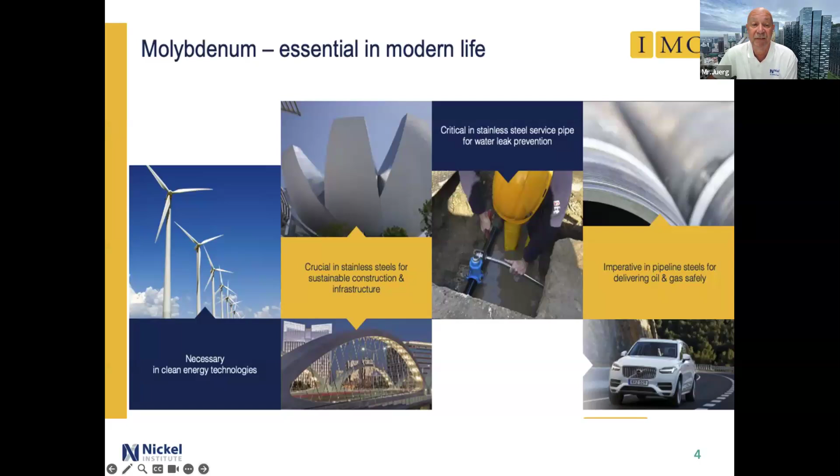The International Molybdenum Association, in short IMOA, is a global non-profit trade organization like the Nickel Institute, representing most of the molybdenum industry. It promotes the properties and sustainable benefits of molybdenum, a key alloying element in stainless steel and nickel-based alloys, enhancing corrosion resistance in various modern applications.

And now it gives me great pleasure to introduce to you Dr. Graham Sussex. Graham is an expert in corrosion and materials consulting with over 35 years of experience. Serving as a consultant for the Nickel Institute for more than a decade, he brings extensive knowledge in stainless steel applications and standards. He has also been a technical specialist with the Australian Stainless Steel Development Association for over 20 years. His active involvement in ASTM and Australian standard development has significantly contributed to the advancement in the Australian-New Zealand welding standards for stainless steel. And with that, I would like to hand over to you, Graham, and to everybody. Enjoy the topic, and I hope we will get a lot of questions. Thank you.

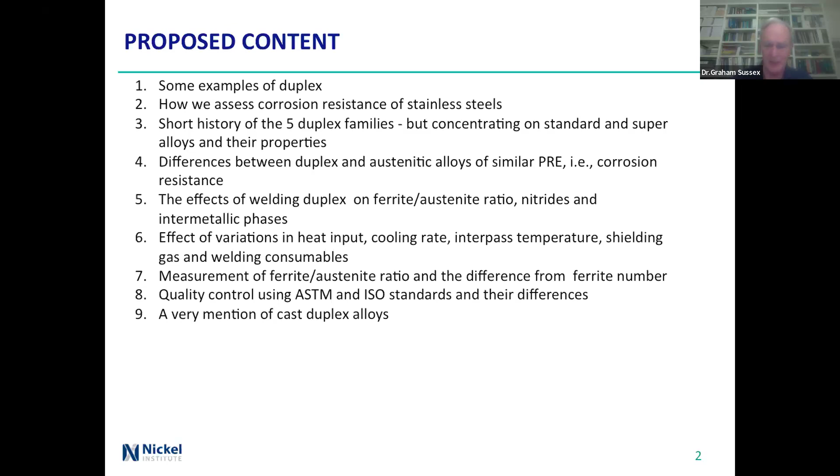Talking about the pictures I showed first, on the left was a super duplex welded tank for impure phosphoric acid - lots of strength, lots of corrosion resistance. In the center, a tank on a ship made out of 2205, a very reasonable match of thermal expansion with the carbon steel hull, a lot better than austenitics. It's pretty strong, reasonably light because it was thin, and it's got corrugations in it to give more strength. Okay for near ambient temperature with chlorides up to certain limits.

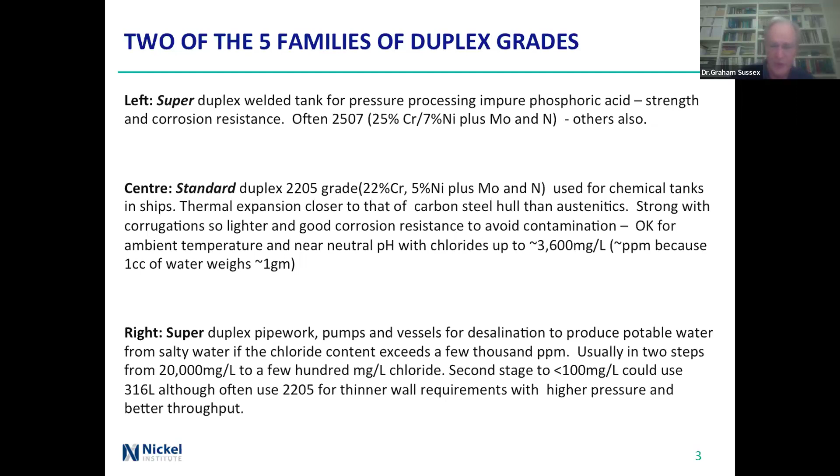Across to the right, from a desalination plant - pumps, vessels, pipe work getting potable water. It goes in 2 steps usually: 20,000 milligrams per litre down to a few hundred, then second stage down to under 100. While you could use 316L for those, often people use 2205 because of thinner walls and so on.

There are 3 more families. The hyper-duplex grade - I don't have a picture because there's basically only one supplier at the moment, seamless pipe and strip, and welding them can be quite difficult. The 2 lower grades, the low alloy ones, have a bit more chrome and moly, better corrosion resistance than the leans, not a lot of difference - you'll see that in a minute. Slightly lower strength, but easier to weld. It was used in the Hong Kong to mainland bridge reinforcement, but more commonly in heat exchanger tubes.

The lean alloys have lower nickel, often more nitrogen, because otherwise it doesn't stay properly duplex. For getting the nitrogen in, they often have higher levels of manganese than you'd normally expect. Lower cost, good strength, great for tanks.

What are the advantages? You get benefits from ferritic and austenitic properties because it's mixed. The mechanical properties are about twice the proof strength of austenitics. It strengthens up with cold work, but not as much as austenitics, so you can get more strength but you won't get the doubling you might get with an austenitic. Ductility and formability is quite good, but again a bit less than the austenitics. And you can select the corrosion resistance.

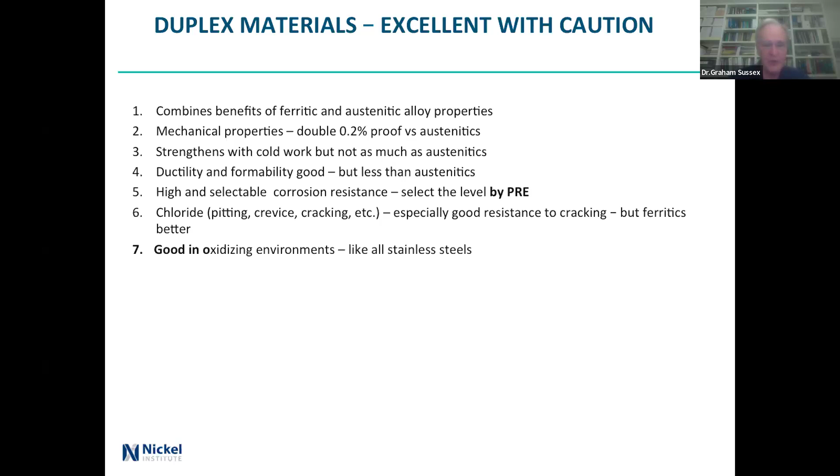Ferritics are going to be better. Very good in oxidizing environments like all stainless steels. High temperatures, well, not really - structural up to about 315°C, although some people hold it to about 280. But you don't put it in the high hundreds for a long time, and I don't mean hours, I mean minutes, because you get bad phases forming. That can be a problem with welds, and we'll talk about that in a few minutes. Low temperatures, minus 50 or so, nothing like the austenitics which go down to absolute zero, minus 273.16 - and the 0.16 is apparently very important.

It embrittles with hydrogen, and it's less available than the austenitics. Austenitics are roughly about 70% of the world market, ferritics 20% or a bit more, and the duplexes have to fit in there. Quite good weldability, but it's a bit sensitive to time at temperature because of getting extra phases, and we'll talk about that.

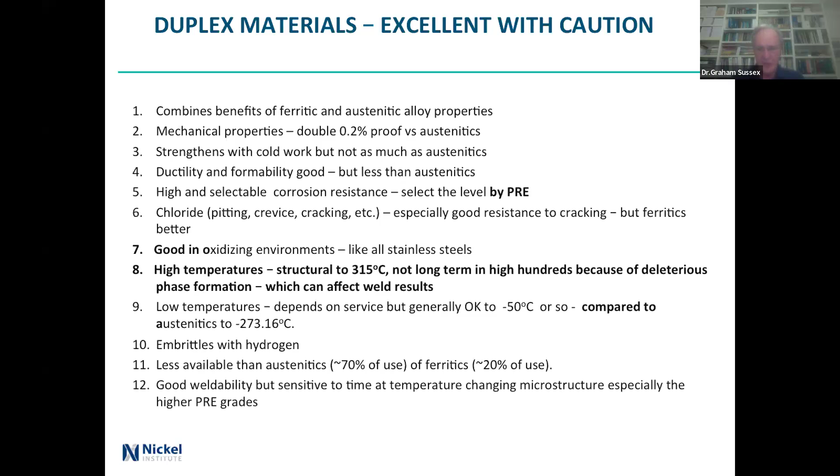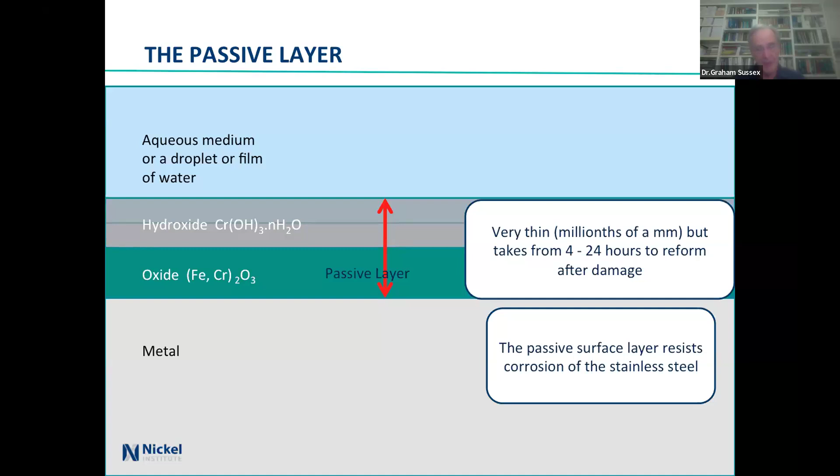So, stainless steels - a passive layer forms when you get moisture in the air, oxygen, a nice thin passive layer, millionths of a millimetre thick, but it takes somewhere between 4 and 24 hours to reform. It doesn't happen instantly, so if you carefully brush the surface up and then put it into service immediately, you don't expect to get absolutely top-rate quality out of it.

What's in it? Chrome, moly, nitrogen give you corrosion resistance, and the nitrogen, nickel, and manganese give you your physical and mechanical properties. The amount of material in there - manganese I've put up to 11, that's only in some of the specials where you've really got to work at getting nitrogen in, because manganese does make it a bit easier.

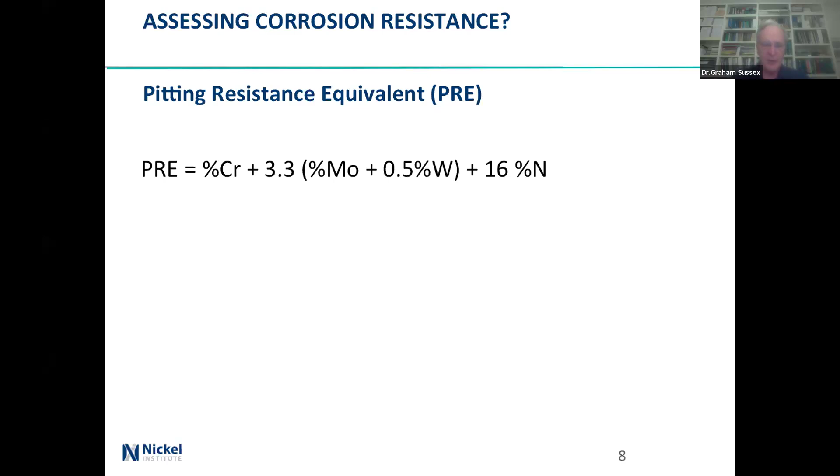Pitting resistance equivalent, the formula you've probably all seen everywhere. The W is only for the tungsten versions that come out of the Zeron 100, that sort of stuff. But the rest has been around for a long while. If you're looking at ferritics, and we're not usually, then you drop out the nitrogen term because basically you don't get nitrogen dissolving.

And if it's more than about 40, then it'll stand up to seawater. There's nickel not in there. I've lost count of the number of times people say the nickel isn't good enough, therefore we're going to have bad corrosion resistance. It's not true. It simply selects what happens in terms of what the microstructure is.

And this is a formula that was worked out for austenitics. It does work for ferritics, it does work for duplex, but it's only an approximation. So if you get a variation of 1 or 2, it may well not be critical, but it does work, as I say, for ferritics.

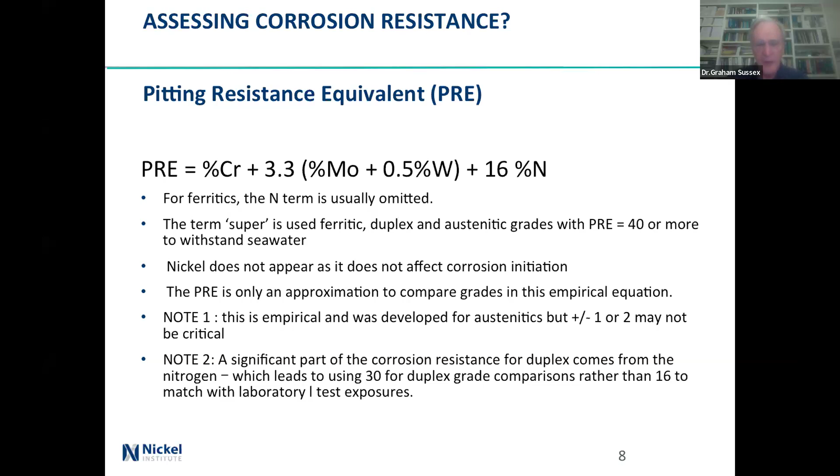A significant part of the corrosion resistance for duplex comes from the nitrogen, particularly for the lower alloy ones. So quite often you will see a 30 instead of a 16, because it was found that if you just used that PRE and compared it with a chemical test, you got a lot worse results from this PRE number, as in it said no, it won't work, but it did work quite well. That's basically because if the nitrogen is up, then you put up a higher ratio.

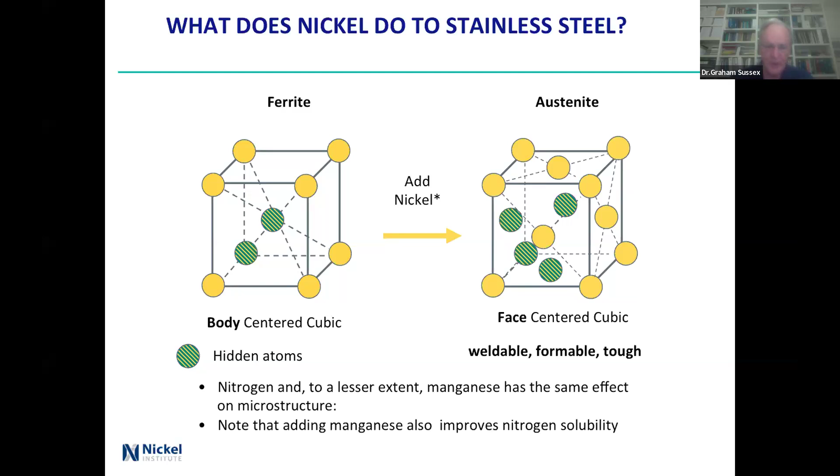Body-centered cubic ferrite, add nickel, and you wind up with face-centered cubic, weldable, formable, tough, and nitrogen is one of the things that help with that, making the structure. And if you add manganese, as I've already said, it improves the nitrogen solubility. So that's ferritic on the left.

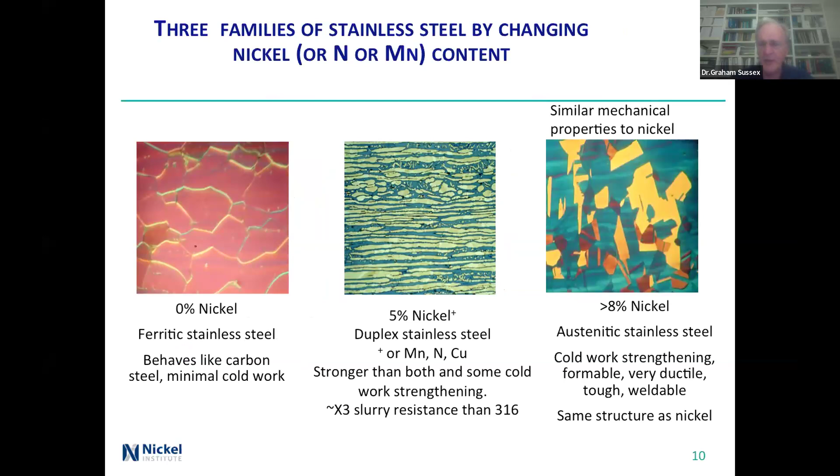Add some nickel, but not a lot, and you get the duplexes, and I'll talk about that picture in a bit of time. And of course, if you go the whole way, then you get the austenitics across the far side.

So just a bit of history. Sweden back in 1929, 357 tons of an alloy made in 1932, so a long time ago. And the early grades were neither low carbon nor alloyed with nitrogen. You had to wait until the 1970s when we got argon oxygen decarburization and control of gases to get reliable welding and to get good compositions.

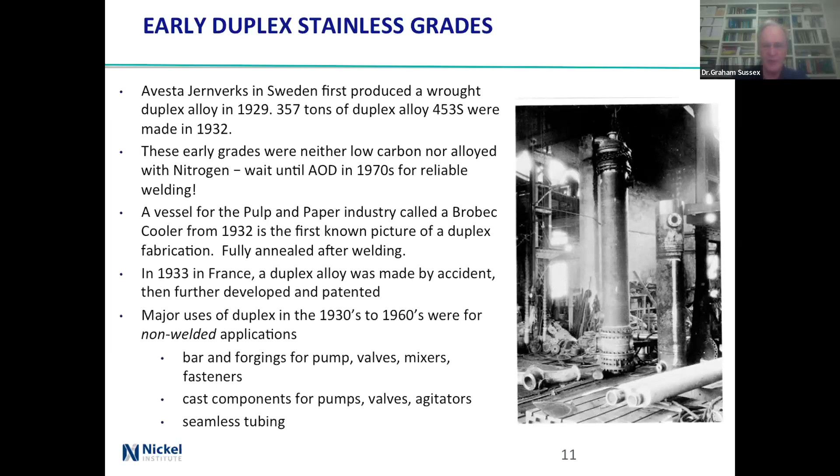So I did the wrong thing. This was a vessel called a Brobec cooler, 1932, fully annealed after welding. Interesting job, fully annealing that. In France, there was a duplex alloy made by accident in 1933, and through from about the 30s to the 60s, it was for non-welded applications: bars and forgings, cast components, seamless tubing, basically because you couldn't weld the stuff. There was no good control of the nitrogen in particular, and it was also a bit difficult controlling the carbon.

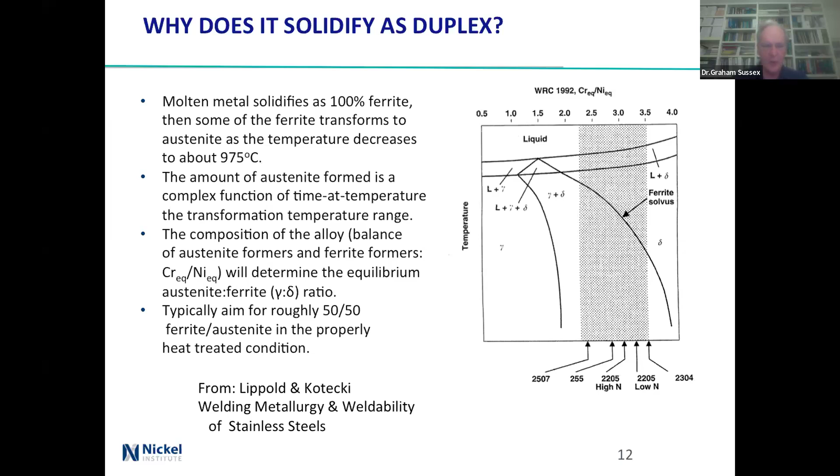If you get too high ferrite, you get poor low temperature toughness, pretty awful stress corrosion cracking from sulfides, poor corrosion resistance because of chromium nitrides forming, and probably lower tensiles. You get too high austenite, hey, chloride stress corrosion cracking here we come, and you'll get lower yield and tensile strength. Typically you aim for ferrites of 40 to 60 in the base metal and 30 to 70 in the weld heat affected zone, but the closer you can get to 50-50, the better.

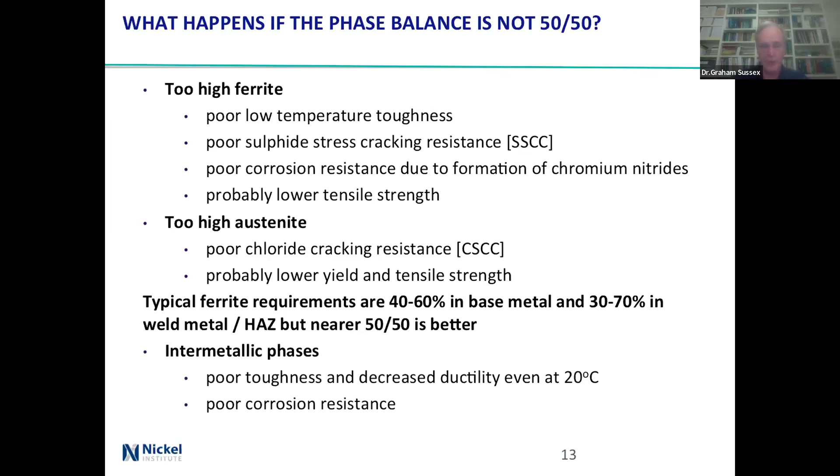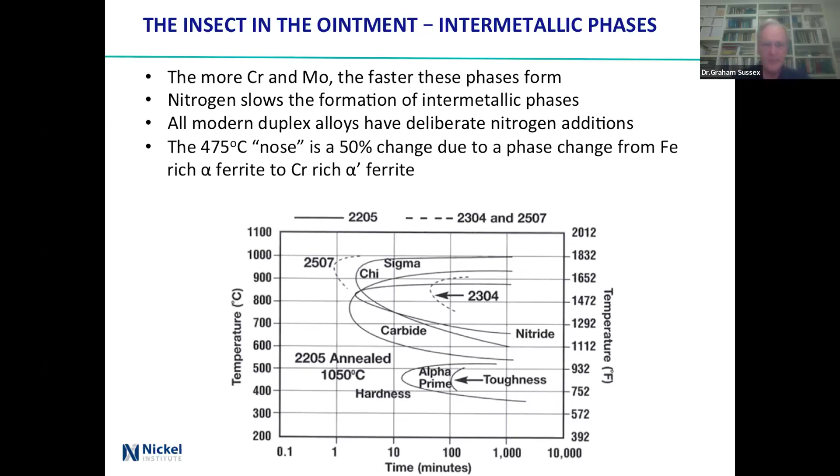These graphs come straight out of a thing that I'm going to reference in the IMOA publication. And 50%, I just said that.

This is a publication straight out of the IMOA fabrication of duplex stainless steels. It's still the 3rd edition. It's been it for a long while, and I've been told that the 4th edition is coming, but so is Christmas.

Okay, so here we've got the low and lean ones, the 2101, 2304 across there, and look down the side and you see that we've got in the 20s for PRE.

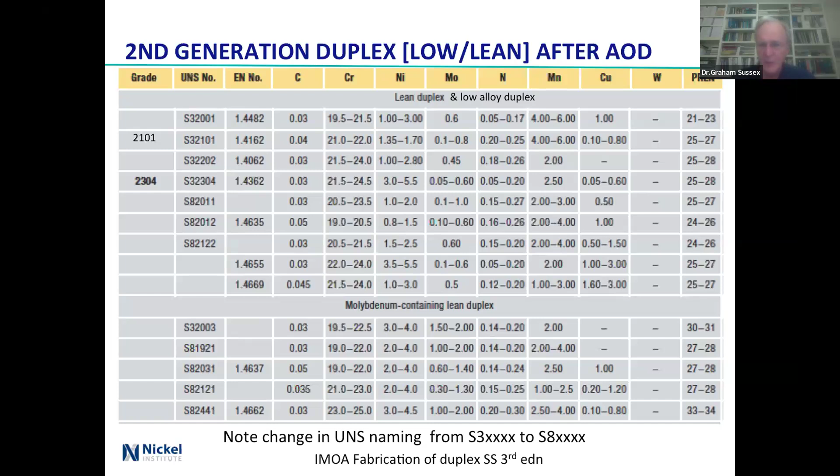So it's better than 316, but it's not as good as full-scale duplex as in 2205. All have got low carbon, all have got added nitrogen, and mostly, as you can look down there and see, there's not terribly much nickel. The moly one's a bit better, bit higher corrosion resistance, but yes, that's the family.

The standard ones, 2205 is the one that everybody knows. One thing that perhaps people should realise is that the old 31803 is dual certified with 2205, and there's the compositions, and you can see why. Basically, the 2205 takes the top half of the corrosion resistance, the chromium, the moly, and the nitrogen, and you've got that sort of level of 35, 36 corrosion resistance PRE.

Go down the bottom, and we're looking at super duplexes, and there are a lot of them, but the common ones, 2507 and Zeron 100, have got the PREs all greater than 40. There were, for a long while, things that were touted as super duplex because of the compositions, but in the standard, it didn't actually say that. And people foolishly were using things that were actually less than 40.

Nowadays, most of them have a little thing in the remarks column saying PRE to be greater than 40 or 41 or sometimes 42. And right down the bottom, 2 grades and 1 supplier. And you're looking at 50 or more.

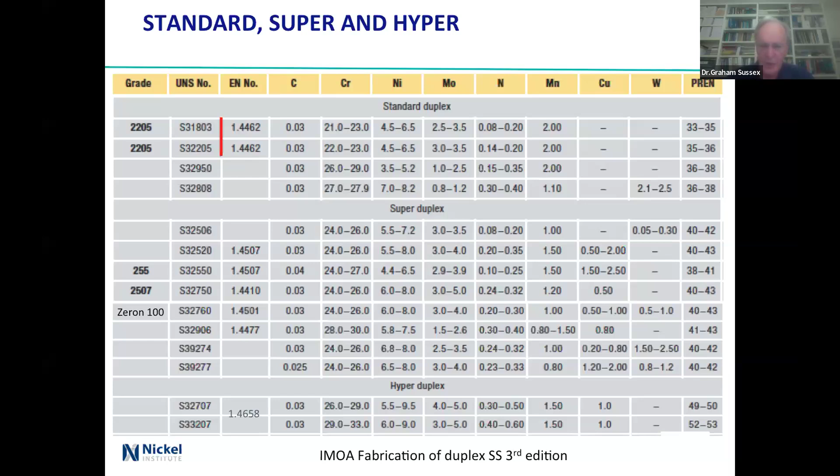Seamless pipe or seamless tube, sorry, or sheet. Well, not sheet, but plate. Welding them is difficult, plain difficult.

Whoops, what happened then?

Okay, strength versus elongation. This is just to reinforce that ferritics, austenitic are less strong than the duplexes, and the martensitic's way up there. And I did mention earlier that the duplex has been drawn. These are pictures of austenitics, but you can actually get quite a bit of extra strength just by cold working the duplexes.

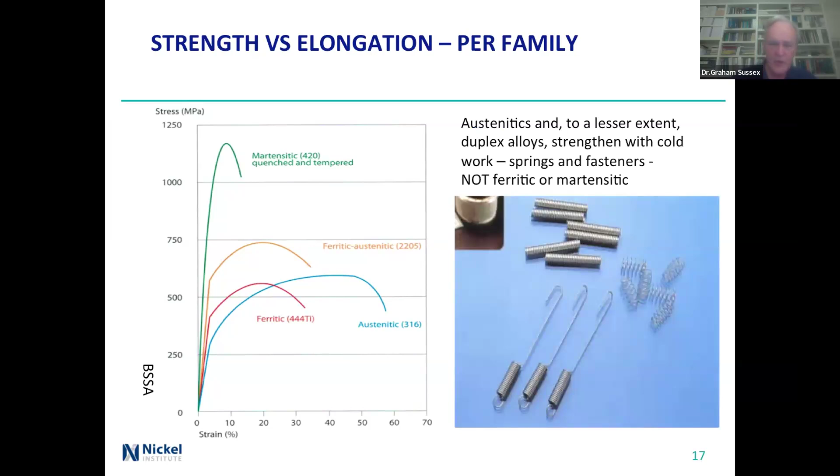What about the actual mechanicals, and what difference is there between ASTM and EN? And the short answer is not a lot. There are fiddling around the edges, but in terms of yield strength or 0.2% proof stress, tensile and elongation, not a lot of difference.

Using A5 or elongation in 2 inches is just language. One thing about it is that the EN standards tend to have narrower ranges than the ASTM. So if you're ordering to EN and somebody supplies to ASTM, you just need to have a look and make sure that it actually will still fit.

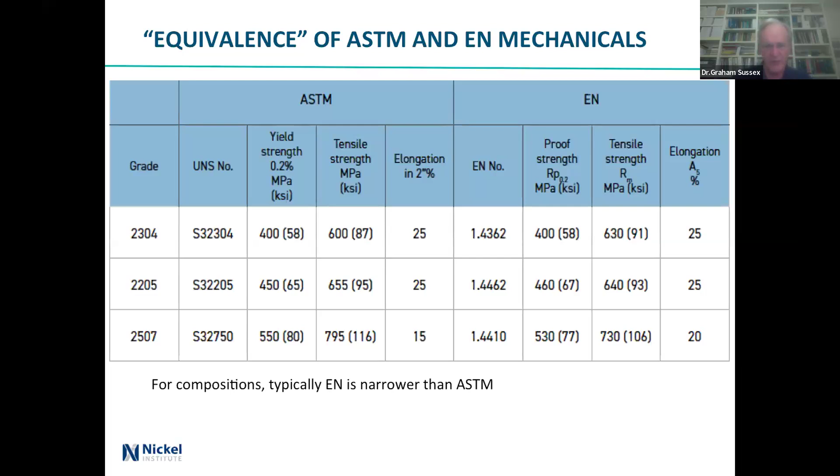Okay, testing standards for duplex. For flat products coming to ASTM A240, and I'm sorry, I do tend to run to the American standards, mechanical and chemicals, but some of the tests were written for austenitics, and some of them, A262, for instance, just don't work.

923 and 1084 work for duplexes, although 1084 typically is used for the low and lean, and 923 for the ones that get king hit.

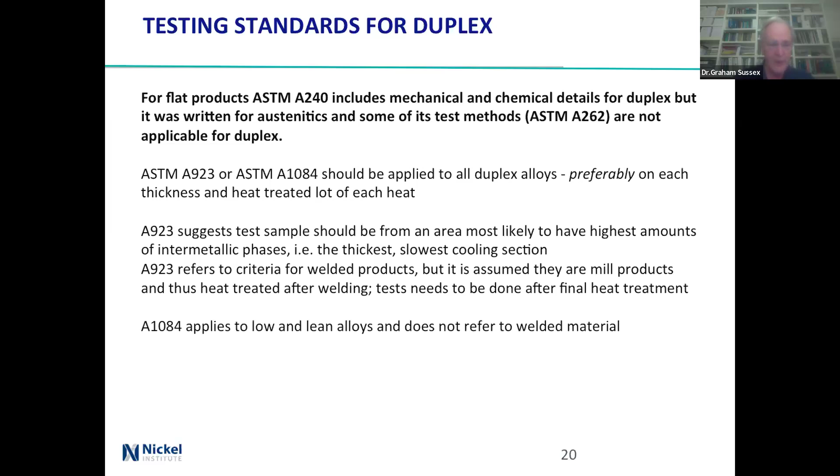1084 is for the low and lean alloys and doesn't refer to welded materials. The tests are slightly different, and I'll talk about them in a minute. They're sometimes used for shop welds, and nickel publication 10044 has been updated and considers both of these standards. From the number you'd think it's very old, but no, it's quite recent.

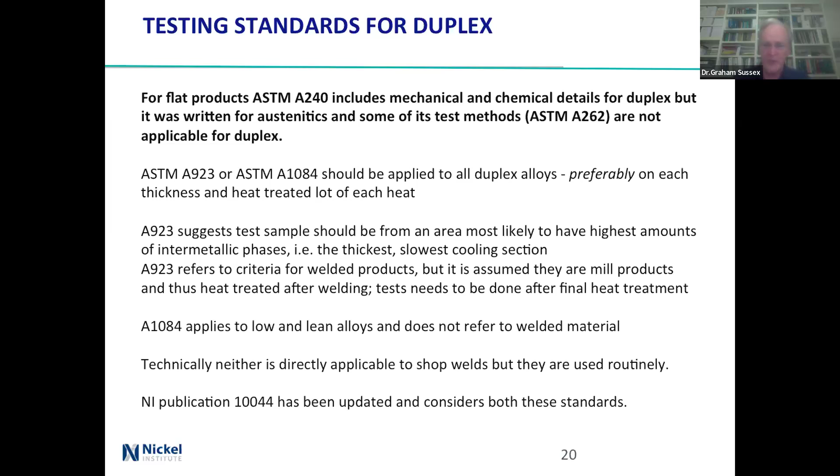So what's in them? It's specifically mentioned in 923: 2205, 255, and the super duplexes, which are wrought, and then the two cast alloys.

It detects detrimental amounts of any intermetallics. Yes, it's a matter of making the decision about just where you draw the line. There are 3 tests: the metallographic, corrosion test, and impact tests. They say that any one of the 3 is satisfactory.

1084 specifically mentions those lean and low alloy ones, and it will detect detrimental phases, but the phases we're talking about are nitrides and carbides usually, because intermetallic phases -- there just isn't enough high alloy content to actually produce that. Slightly different tests, but only one of the 3 is required to make it work. A lot of people do all 3 tests on both.

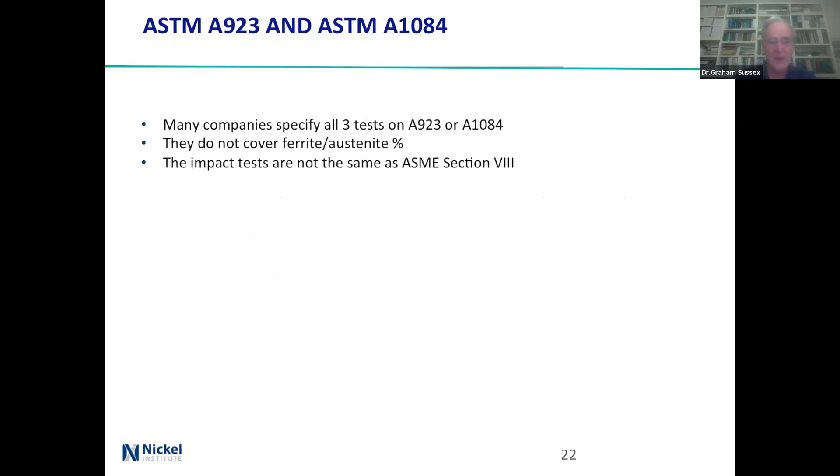One of the little problems is that it doesn't cover ferrite-austenite ratio, and you're supposed to be 50-50. The impact tests aren't the same as in ASME 8. The pass-fail criteria for the corrosion tests are to look for detrimental phases, not a specific corrosion resistance, which may be set by the specific composition. So you may get away with having a certain amount of detrimental phases where the rule says no, but if you actually do a test, it may well be okay.

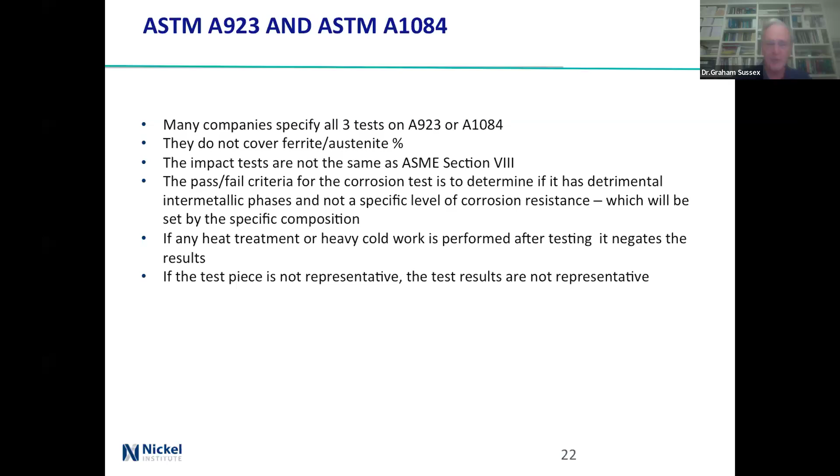If you do any heat treatment or heavy cold work afterwards, it negates the results completely. And where's the test piece from? Is it from the thickest bit or the thinnest bit, or is it near a weld? If it's in a place that's going to fail, you need to be testing in the right place.

There's an ISO 17781, which the oil and gas people use, and that basically works for all duplex stainless and puts them into 5 categories, so we've got 5 levels. It also covers ferrite levels, as well as detrimental phases.

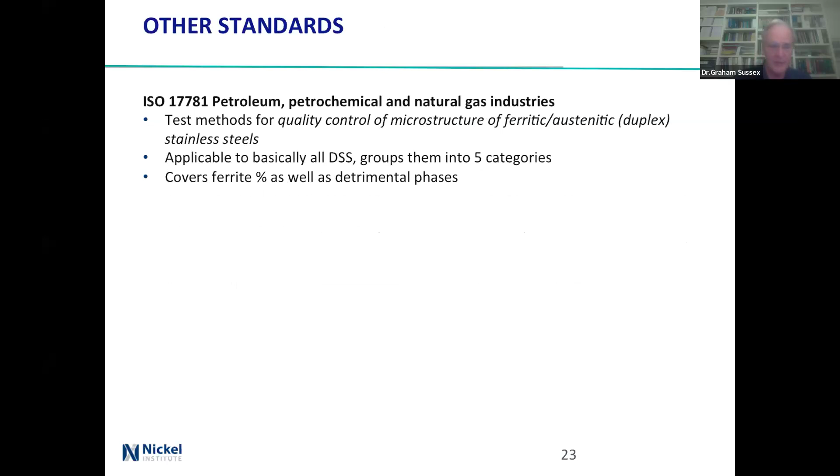It specifies a lot more details about where you take the sample from, as in the thickest bit, at bends, near welds, etc. It will look at covering welds in the as-welded condition, as well as wrought, cast, HIP isostatically pressed material, and it's a bit more specific and comprehensive about what you've got to put in the test result reports. You've got to report everything -- it's not just pick one, but that's it.

The Norsok standard, from the Norwegians, commonly used in the North Sea -- very good standards, but it is very tightly tied in with that.

If you're looking for the ferrite-austenite ratio in wrought material, it's usually expressed as a percentage ferrite, which goes from 0.1 up to about 80, or as a ferrite number, from 0.1 up to 110. They're not the same -- I'll give you an example of what it means. And you can measure it several ways.

ASTM E562: you take a wrought sample, cut it transverse to the rolling direction, polish it, etch it, put it under a microscope with a grid -- that can be a circular grid or a square grid or whatever -- and count the intersections with the particular phases that are there. You're going to need hundreds of points if you want lots of accuracy -- very time consuming, very prone to operator error, and it's a destructive test, and it's slow.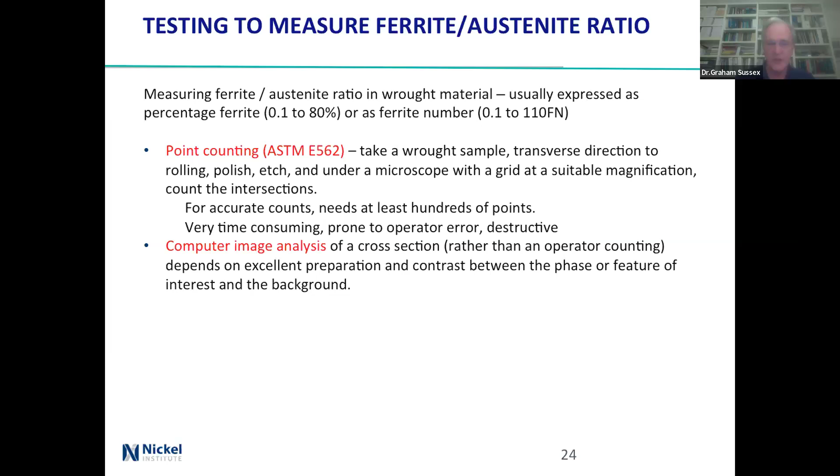Computer image analysis -- great, easy. Well, yeah, except that you've got to do the cross section, you've got to etch it properly, make sure it's a really good, clean preparation and etching, and then it'll be able to detect the phase or feature of interest compared to the background. And that's often quite difficult.

Or you can go for a magnetic technique, magnetic things, and you can get quite close to a weld and get good results from that. But it's not quite as accurate because it doesn't detect very small areas. You have to properly calibrate it, and it's not so good if you're measuring on a surface that's rough. And you can't measure small HAZ separately from the weld, whereas you can with the point count.

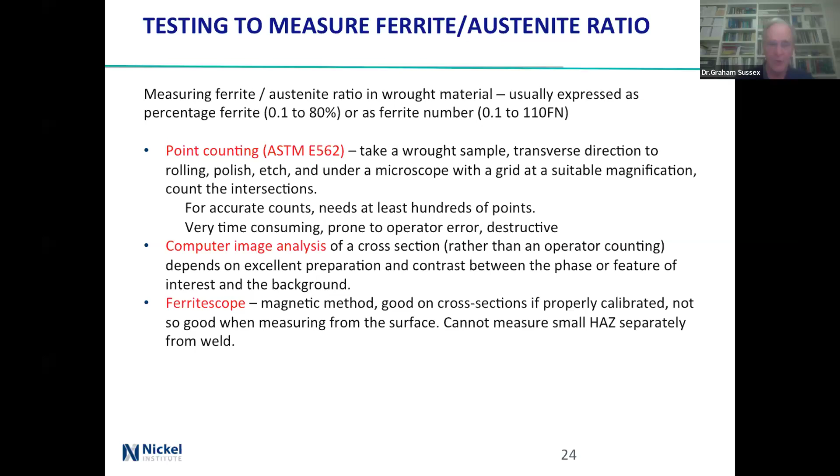Just some comments about that. If you're talking about high ferrite, okay, low ductility, loss of corrosion resistance, and cracking, hydrogen cracking. High austenite, low stress corrosion resistance, and usually low strength. And if you go, well, you can balance it and keep it in the middle. But if you're in balance composition, high nickel and high nitrogen is to increase the austenite. If you want that, fine.

Heat input, low heat input, likely to get excess ferrite because it'll cool down very quickly. It doesn't get time for the austenite to form. And cooling rates, if they're going down too slowly, then you'll get much too much austenite. Too fast, too much ferrite. And in the middle, you get the intermetallics.

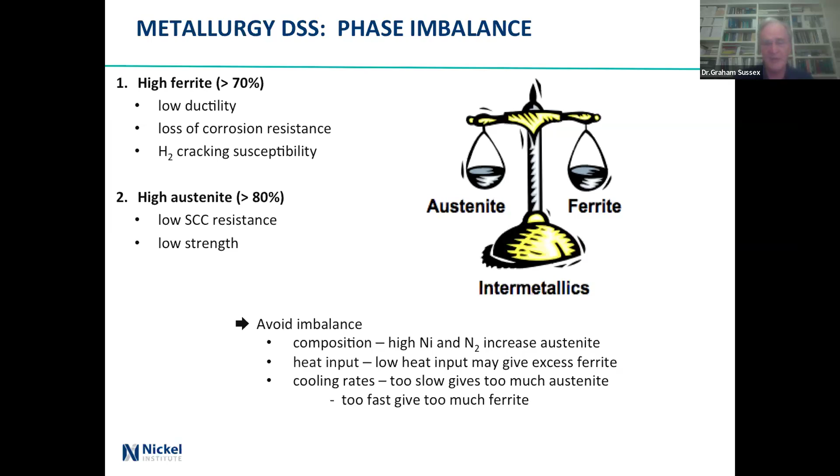Gives you what accuracy you want, and they suggest looking at either a third or a tenth or 5%. And that really makes some assumptions about what phase you're interested in. So are you going to have a square grid, a round grid, whatever? Because you do want to make sure that you don't go intersecting multiples. And if you do cold work to get a heavily worked martensite, you may contribute errors.

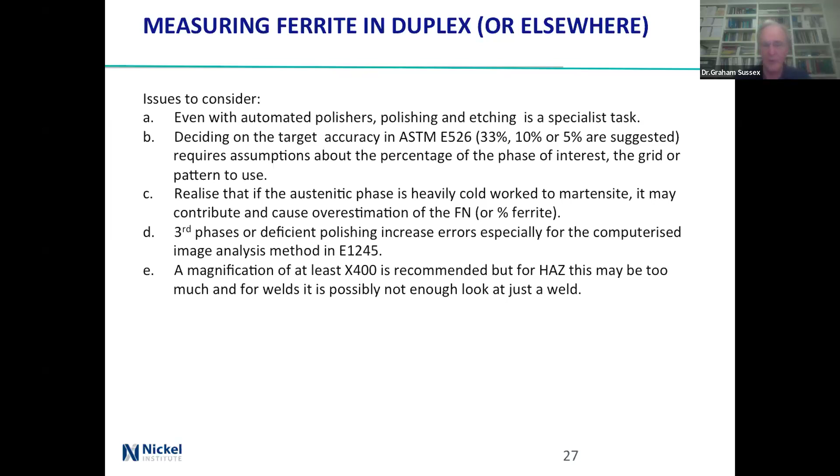So if you're using a ferrite meter, you'll get a number. And third phases, or lousy polishing, is going to give you errors, especially if you're doing computerized image analysis. They recommend at least 400 times 400. Well, the problem with times 400 is that in a HAZ, that may be too much. And if you're right in the middle of the weld, then how do you just look at the weld?

You can measure it other ways. You can use a Ferritescope. I said that before. It'll give you units designed for welds in austenitic alloys, not in duplex alloys. So there is a calibrated ferrite number used in the Welding Research Council 1992 graph for designing consumables, and it can sample quite small areas. I mean, you look at the size of the sample and it's less than a centimetre.

Or you can directly measure the force required to get a magnet off it by a Magnascope. Bit of an issue with standoff there and shape of the surface, but still it is recognised, not commonly used. Ferritescopes are much more commonly used. Or if you're looking at really low levels, use a pull-off gauge, but that's old history for the days when you were looking for levels of ferrite in austenitic stainless steels.

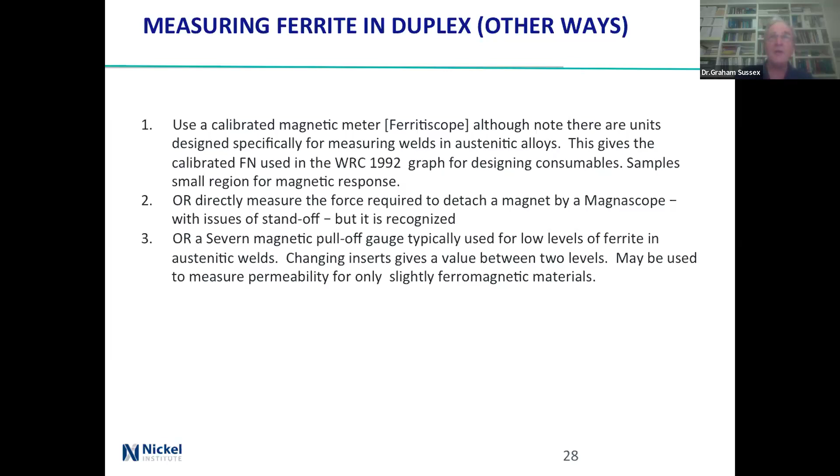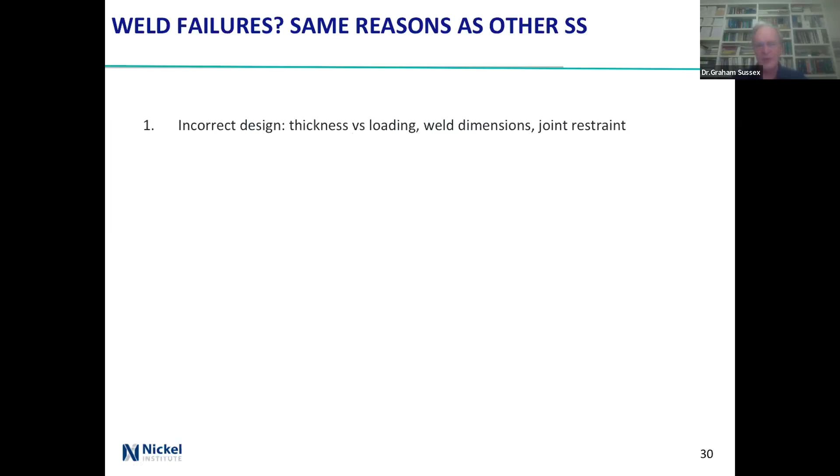Why do you get weld failures? Well, incorrect design, thickness versus loading, weld dimensions, joint restraint, wrong weld procedures.

Experienced people working into a new area - somebody who's used to welding austenitics moves across to duplex. Heat input, interpass temperature differences, because interpass temperatures for the austenitics tend to be not nearly as sensitive.

Excessive stress raisers - that's all over the place because it raises the fatigue risks. Poor welding, contamination, rough ground surfaces, lack of root penetration or fusion. That never happens, does it? The welding's always good.

Undercut, overroll, slag inclusions, gas pores. People worry about gas pores all over the place, but unless they're due to water and you wind up with a whole cluster of them, then it's usually not too serious.

And other stress raisers, just not following the weld procedures. The major extra issue with duplex is just the sensitivity of the heat input. Put too much heat in, keep it too hot too long, and you'll muck up the actual solidification and you'll wind up with wrong ferrite-austenite ratios.

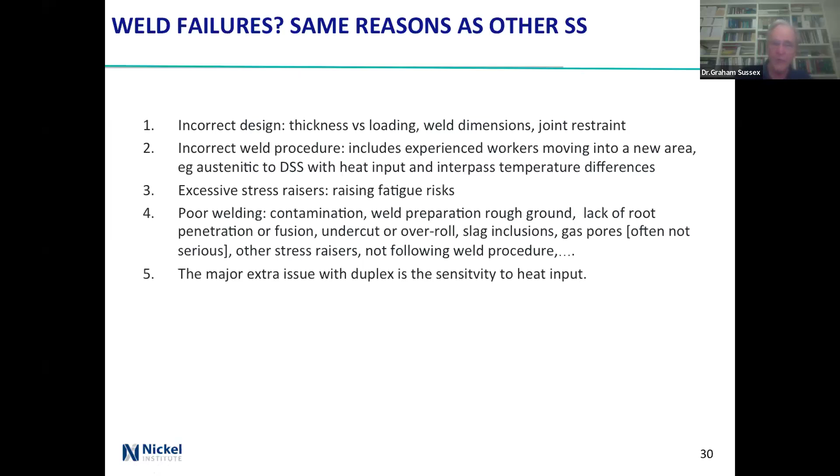Looking at intermetallics, the higher the chrome and moly, the quicker they're going to form. They remove support of the protective oxide film on the surface, and quite possibly embrittle because when you get down to room temperature, they will just embrittle and crack. They also take away the protective oxide, and you may wind up with corrosion.

If you're putting nitrogen in, that happens with the low alloys, it slows down the formation of the intermetallic phases. But the early duplex alloys had no nitrogen control, so they really didn't know where they were. They were very prone to both high ferrite and the formation of intermetallic phases that you really don't want.

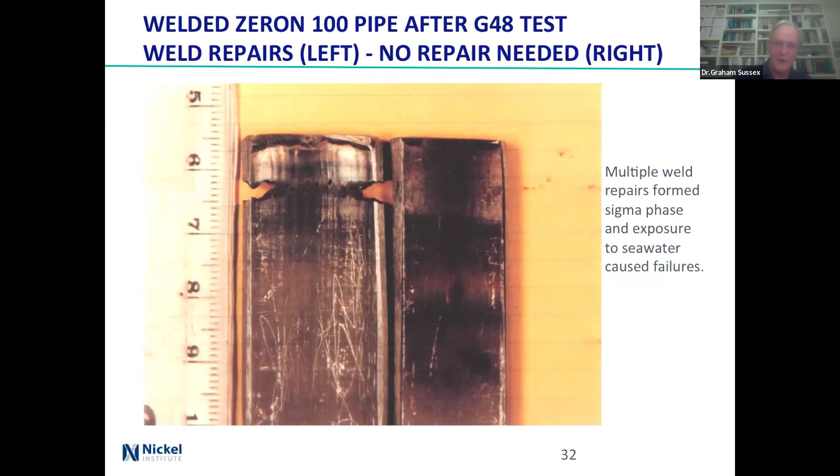The one on the right was after they had done proper welding, with low heat input. It's gone through the same G48 test, but there's no sensitization. So across that band, at that level distance, you've got intermetallic phases forming, and it just corrodes quite rapidly - it was sigma phase. I've seen test pieces where you put 20% or so of sigma in there and then heat treat it, it goes away and it's beautiful. But of course, people don't do that if they're building stuff on site.

What about rapid cooling? The obvious place is arc strikes. Well, arc strikes never happen on the surface, do they? They always happen in the weld or on a starter tab. I hear hollow laughter through the ether.

If you've got a small arc strike, it's basically splat-cooled on a very large heat sink, and it's almost pure ferrite. It'll cool down until it's too low for the austenite to nucleate and grow. What happens to the nitrogen that was in the ferrite? There's no austenite to actually take up the nitrogen, so the nitrogen precipitates out, the chromium combines with it, and you wind up with chromium nitride.

Chromium nitride - chromium tied up with the nitride means you've got less corrosion resistance, and so you wind up with a problem. Typically, if you look at an arc strike, it's got big grains of ferrite, traces of austenite on the grain boundaries, and that's about it.

The ferrite doesn't have much in the way of nitrides, but right up close, beside the austenite, it's okay. But if you go away from the austenite, then it's loaded up with chromium nitrides, and the surrounding zone is depleted of chromium simply because the nitrides have taken out the chromium. So instead of being chromium oxide, it's chromium nitride.

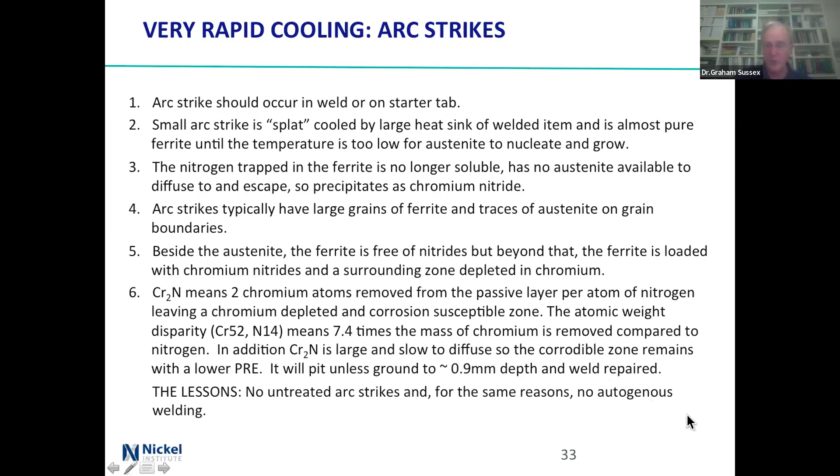Lessons: no untreated arc strikes, and for the same reason, no autogenous welding.

What do we want in a welding process? Slow cooling to about 1,000 degrees to allow the austenite to form, and then a fast cool to about 550 to avoid the intermetallics. Well, you can't exactly specify that, but you can say it.

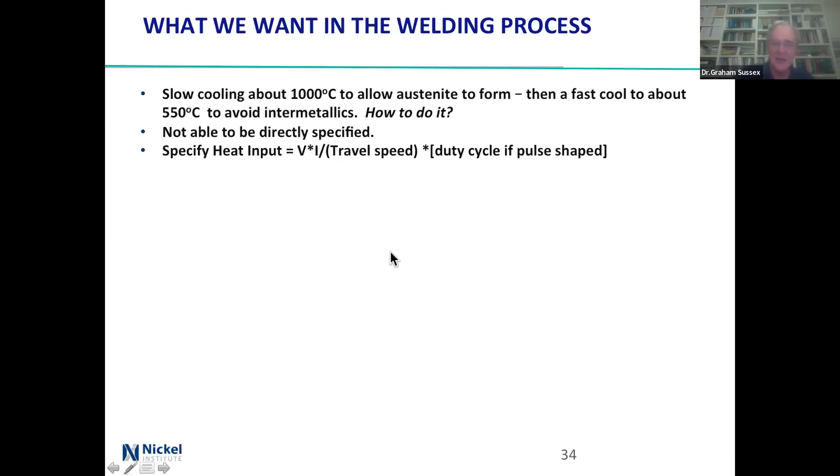But the heat input is just that, divided by the travel speed and the duty cycle if it's pulse shaped. That's not actually something exact, it's an experience thing, and you write the procedure that will actually do it. You're going to allow for the thickness, the dilution, the parent metal temperature. If it's all cold, it's going to cool quickly, and the efficiency of the weld process, how much energy you're putting in and how it's getting transferred.

And for duplex, you've got to give a maximum, and I'll show you a picture of it in a minute, but also you've got to give a minimum, because otherwise it cools down too quickly and you don't wind up with proper formation of the two phases. Typical for 2205, about 0.5 to about 2.5 kilojoule per millimetre.

Maybe you can get to a lower minimum if you're using a laser or laser hybrid welds, because you're not putting quite so much heat in. But you wouldn't use autogenous because the heat input's going to be too low and because any nitrogen will just go away.

And what do you do? Well, heat treatment. Yeah, you might preheat it, but really it's only just to warm it and dry it out. Or if you're talking about a really thick section, yes, okay, you may have to preheat it. I'll talk about that in a moment when we talk about this REAC example.

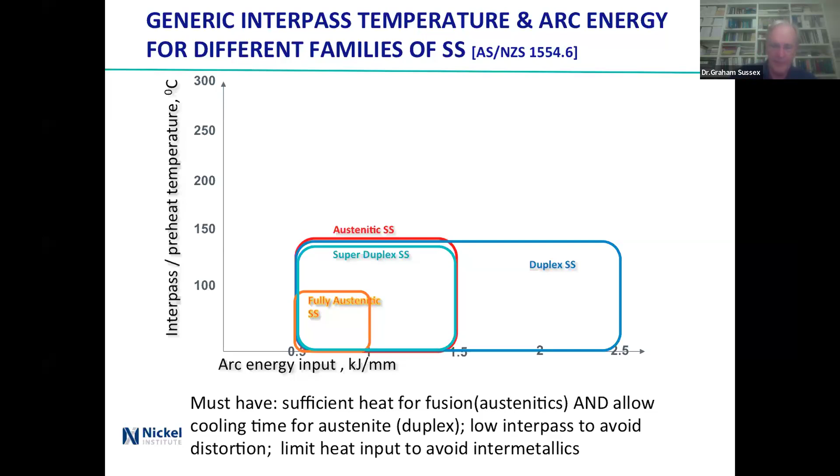Low interpass temperatures to avoid, yes.

One little complication is if you're swapping from one metal to another, then look at what happens with more nickel or less nickel. So mild steel and 12 chromes, lots of penetration because there's very little nickel. 304, 2507, 2205, same sort of band, that much penetration. And the really high nickels, not much penetration at all.

And higher nickel also makes a more viscous weld pool. So increasing the current won't speed up the welding no matter what you do. You just get too much heat in, you'll get it too hot, and then you'll wind up with other problems.

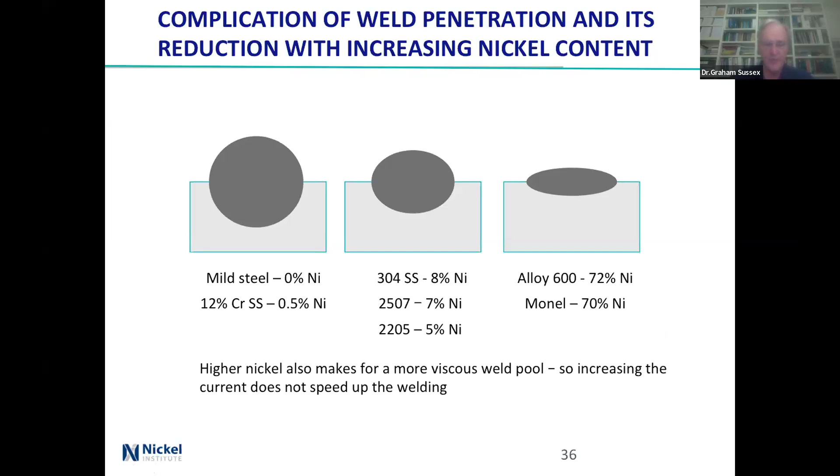All right, so assessment of the weld metal. In the weld metal, it's a mixture of the filler, the base metal, and whatever nitrogen has got taken off from the weld pool. If your shielding gas has got nitrogen in it, or if you're welding in a pipe and you've got purge gas with nitrogen in it, then you'll get nitrogen taken up and that will help to give you austenite.

Time and temperature is going to be a function of the cooling rate plus heat from any multiple passes. I'll show you an example of that from American Welding Journal. It's quite interesting - each pass gets a different thermal history, and you'll get the percentage ferrite changing and different intermetallic phases. In the heat affected zone, the composition won't change all that much, but the thermal cycle means you may get intermetallic phases and a bit of a change of the austenite-ferrite balance as well.

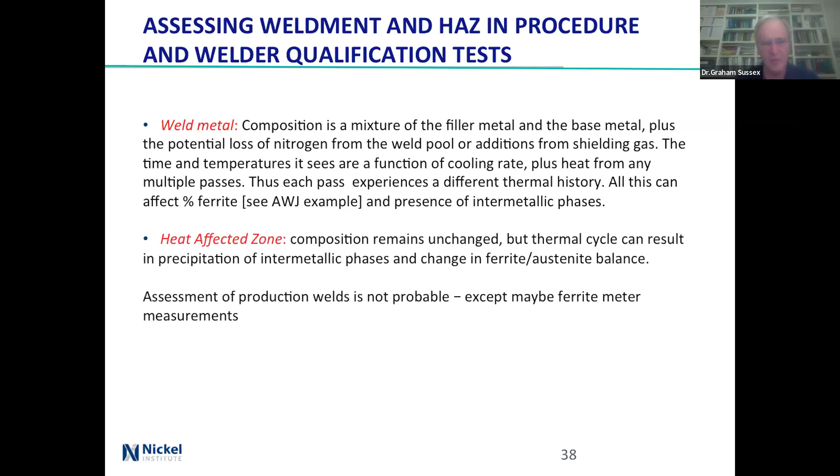And if you're trying to assess production welds, how do you do it? Well, you could use a ferrite meter, but you can't easily do anything else in terms of getting ferrite-austenite measurements.

Okay, what are the HAZ properties? You can specify things like the ferrite range, maximum and minimum, but how big is the HAZ zone and how are you measuring it? Intermetallic phases - well, you're just going to have to look at it. A pitting corrosion test - use different temperatures for different grades, and they're set out in the standards. Low temperature toughness, V-notch at -40, possibly -20 if you're not going down a long way, but a lot of standards just say -40 and that's it.

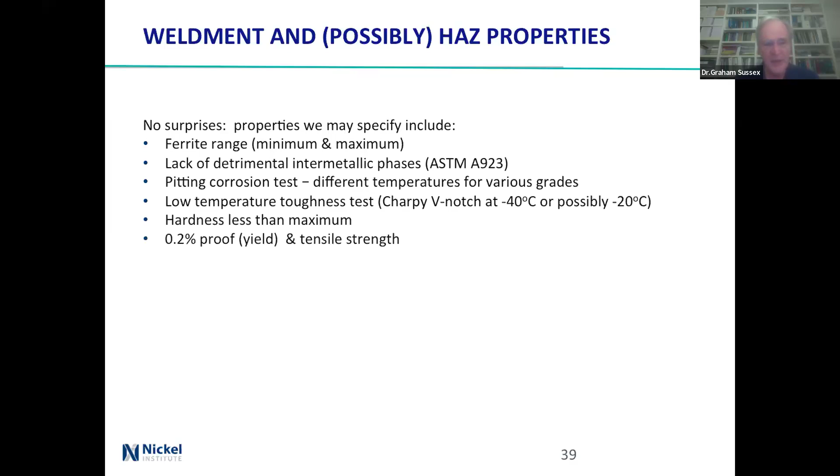Hardness less than the maximum - that's not usually an issue. And 0.2% proof and the tensile strength. I really don't like people talking about 0.2% yield because it's a stainless steel - it all cold works.

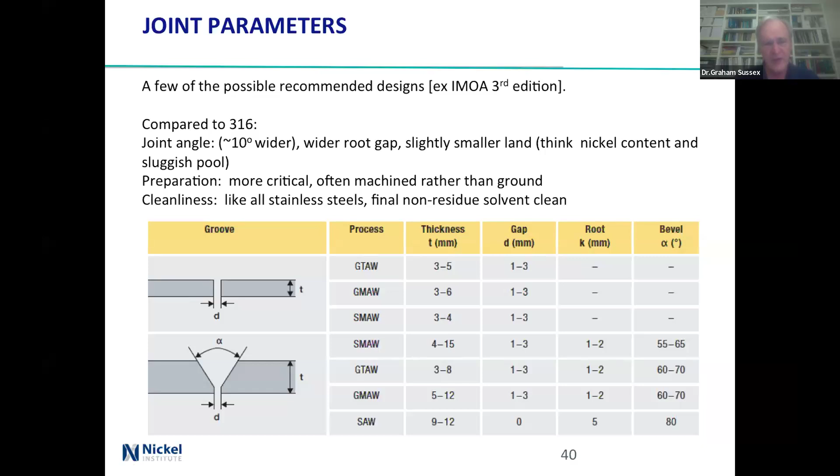And weld prep - grinding, perhaps not. You want the surface nice and clean, nice and smooth, and you want it clean. A non-residual solvent clean at the end, not anything that's going to stay there and can be detected.

Okay, same processes as for austenitics. Lower heat input - not recommended. So if you're using laser or resistance welding, well, if they need nitrogen at the upper end, yes, that would work. Resistance welding, yeah, okay - how do you avoid issues? Well, you can flood it with nitrogen. Laser welding has been used for T and I structural beam, putting a nickel foil in it, but it was a difficult process, so it tends not to be used now. And GTAW without a filler is not allowed unless you're going to anneal it, because low kilojoules means possible nitrogen loss, and so your phase balance would be an issue.

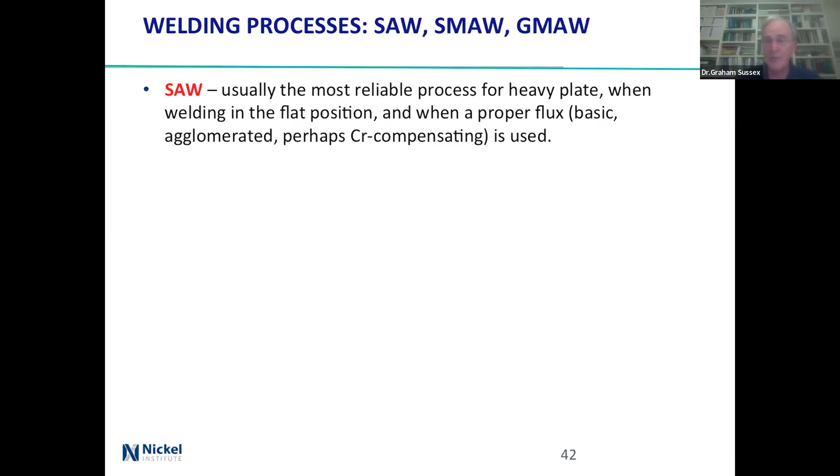Most reliable process for heavy plate is submerged arc, if you're welding in the flat position, and when a proper flux is used - perhaps even a chromium compensating one - but you need to actually know what you're doing with it. Shielded metal arc uses nominally matching filler metals, but unfortunately they're usually over-alloyed with nickel, which is all very well, but as it cools down, you're going to get lots and lots of ferrite taken away.

As low as 25% - that's getting to the bottom end of what you can actually get and still call it a duplex. So you may be better off just accepting the recommended matching filler metals. Certainly if you're doing weld repair on castings, you would be full annealing, and so you'd have to match it up fairly nicely.

GMAW, as with austenitic, can use short circuit, pulsed arc, spray mode, and gas is appropriate - not common to use nitrogen, and the weld profile tends not to be as smooth as for austenitics. I think I'd go stronger than that, but still.

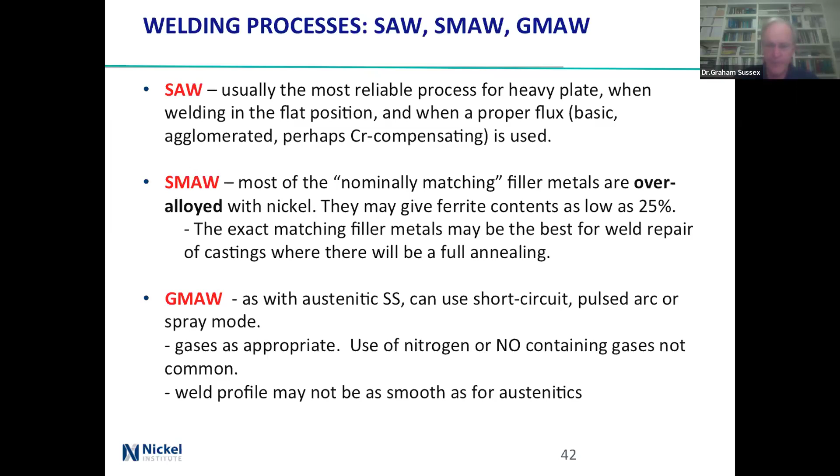Flux cored is common, using 100% CO2 or argon-CO2 mixes. There has been a problem with getting decent Charpy V-notch impact properties. The impact test in 923 uses -40, and if the item can be used at -20, then hey, the weld may be suitable, but it's a thing that's known and needs to be carefully looked at.

GTAW or TIG, nitrogen the torch gas, yeah that'll help, 1 to 5%. Purge gas, if you're looking at a piece of pipe, you always have purge gas, and it always helps if you've got it, because the root is the thing most likely to get corrosion problems. So you put some nitrogen in.

You can use Formier gas. The hydrogen will take out any heat tint if you've got a bit of oxygen around. Formier to nitrogen, to argon plus nitrogen. Largely people are going to use all nitrogen. You really don't do wash passes because you're just going to get the thing warm enough to probably cause problems, without actually doing much in there.

And if you're doing repair welds, do you actually get the filler metal to the repair? And it's low heat, so have you actually got enough heat in to get proper austenite content to form before solidification? Because remember, it solidifies as ferrite, and then it has to cool slow enough, below 1,000, so that you actually form the austenite.

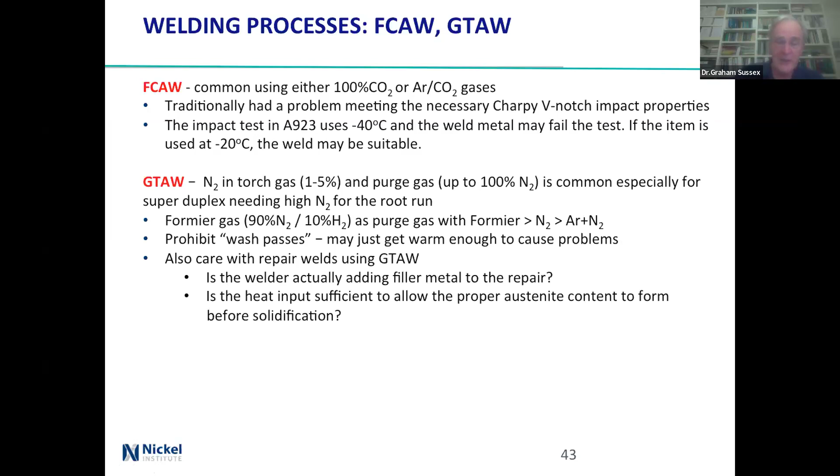For the lean and low alloys, there are so many alloys. You saw how many there were. It's much better to use the manufacturer's data for the best guide. People often use 2209, lots and lots of nickel in that, but you wouldn't use that if you're worried about moly because of detrimental effects to the specific service.

I didn't know about this until I looked it up, but there's some research suggesting that in alkaline chloride, there may be an issue with that. But it's very specific to particular environments, the acids they're forming.

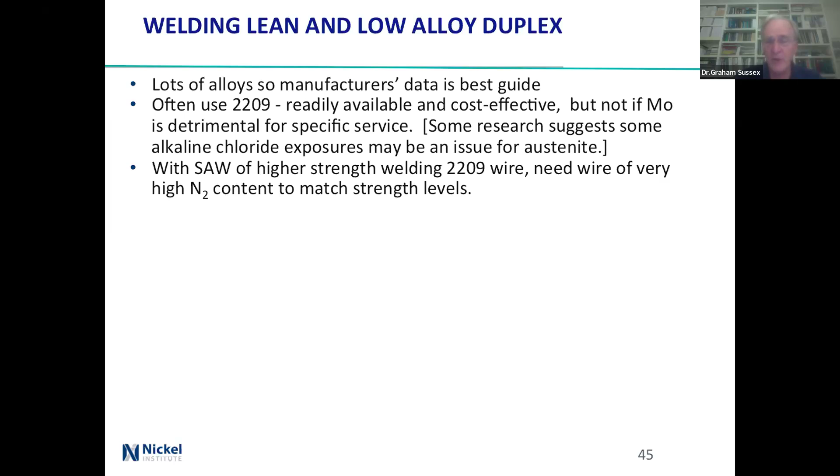Submerged arc, then 2209, your wire needs to have pretty high nitrogen content to match the strength levels, because otherwise you won't have enough. Minimum heat input generally given as 0.5 kilojoules per millimeter, but can be lower, provided you've got enough heat in there to actually get the solidification properly. And maximum heat input for the lean and low alloy generally is going to be lower.

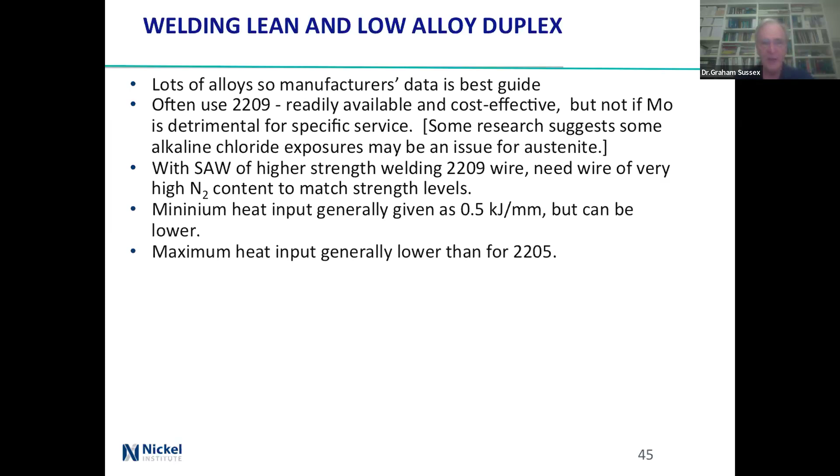2205, standard fill is 2209, but if you're welding that rather than 31803, so you're up in the top end of the range, then look at the high end chromium, moly, getting at the high end there. So you do have more corrosion resistance in the system, but 2209 has just got 22 chrome, and maybe you need to be looking at a bit more nitrogen.

Sometimes super duplex root weld, but you need to be careful. You need to make a similar size weld for the root and second pass because the super alloy is stronger. That means if you just had the root as super duplex, then you've got something close to the inside that's not as strong. So, two passes and then go back.

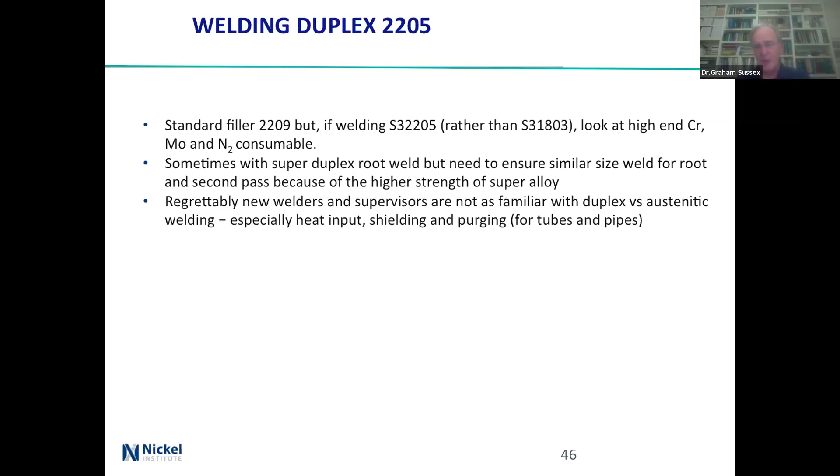Unfortunately, new welders and supervisors may not be as familiar with duplex. People typically go from carbon to austenitic to duplex, and particularly need to worry about heat input, shielding and purging if you're talking about tubes and pipes.

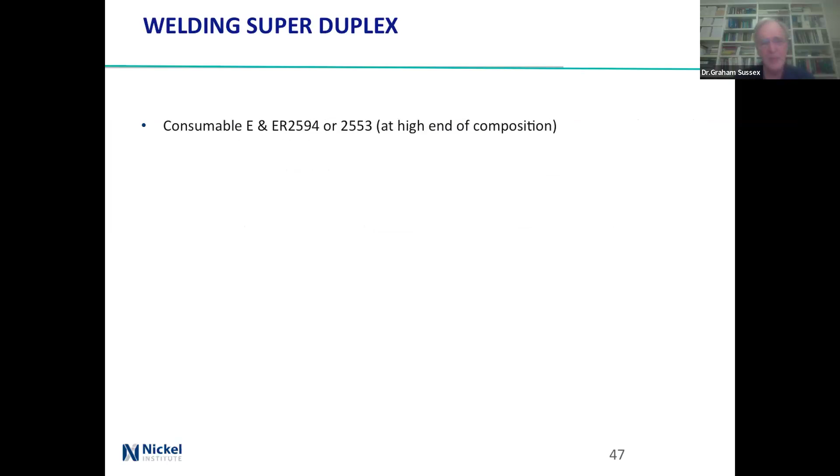Welding super duplex, high end of composition, just because, hey, you're looking at something going into a very aggressive environment, and you're going to lose some of the consumable during the actual welding process. Lower heat inputs than 2205.

Yeah, something I'd like about that. If you're talking about submerged arc, then you can often go up higher. Low interpass temperatures because you don't want to keep it too hot for too long. You'll get some intermetallics in the super duplexes, but it's not going to be a problem unless there was a problem already, and then you've got a problem, and you're doing another weld, and you're likely to have a similar problem, chasing your tail.

All the super duplex alloys weld okay, but sometimes there can be application with tungsten or copper additions - copper because of acid resistance, and tungsten because the particular company that does it uses it and gets very good results.

Using nitrogen shielding and backing gases is more important with the super duplexes because they've got higher nitrogen and you're going to lose it from the weld pool. You can weld with the nickel base at 625, but lower strength, and you're likely to get niobium nitride precipitates. And for those of you who think back to nitric acid and 316, 304, you get titanium nitride and knife line attack, which is not nice.

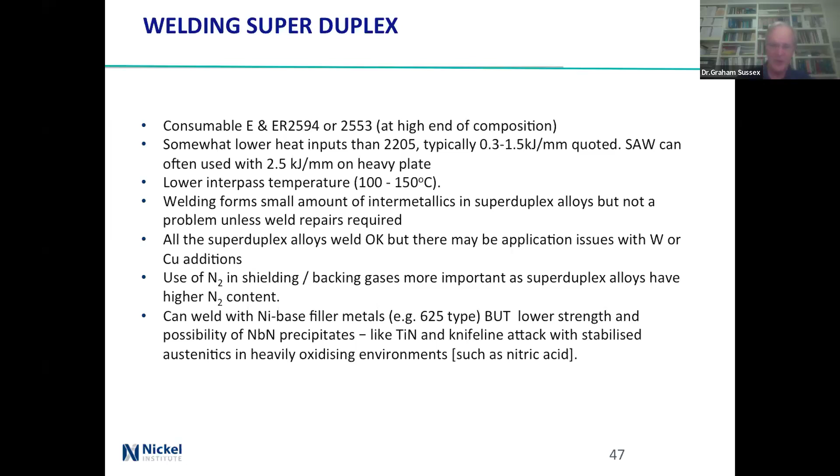This is as welded and changing the gases. 100% argon, 35% austenite; 98% argon, 37%; and 94% argon, 42% austenite. Why? Because the other thing that's there is nitrogen, and nitrogen is austenite forming.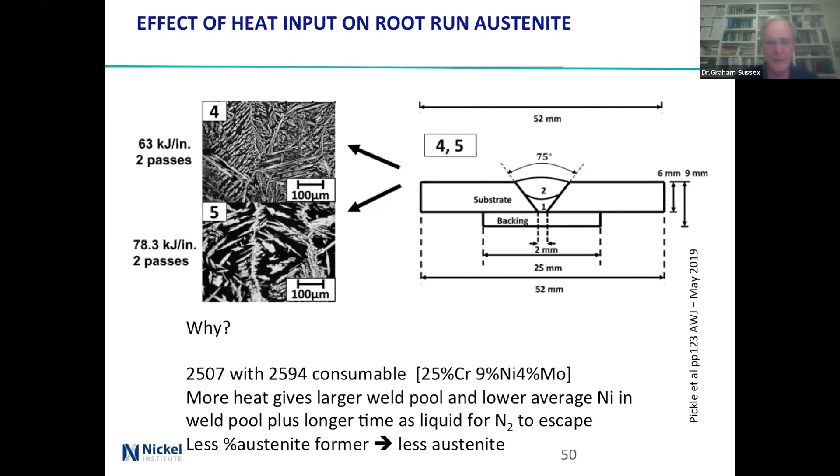The things you find when you delve into a weld.

Okay, now we're looking at ferrite balances: filler composition, what heat input is there, and the cooling rate for thin materials, especially if you're going against a thicker plate. And don't forget about people who are trying to get through very quickly and putting lots of heat in, because they're paid per the item. Dilution, the nickel content, loss of nitrogen from the weld pool - I've just shown you the example of that.

Nitrogen in the shielding gas, put nitrogen in the purge gas, and effectively root passes, the later passes on the root run shown in the previous slides. Nitrogen's improving the austenite reformation in duplex steel - that's almost a tautology. You're aiming for 30 to 70% volume ferrite, but you really want it nearer to 50-50.

Shielding gas, 1 to 2.5 when you TIG welding. Purge gas - you can lose 50% of the ferrite in the root run. That's not all that good. And conversely, drop it down by 0.05 and the ferrite will go up by 10 to 15%. So it's actually a fairly delicate balancing act, and you actually need to think about it. But that's usually the person who's actually the welding engineer who's done the design.

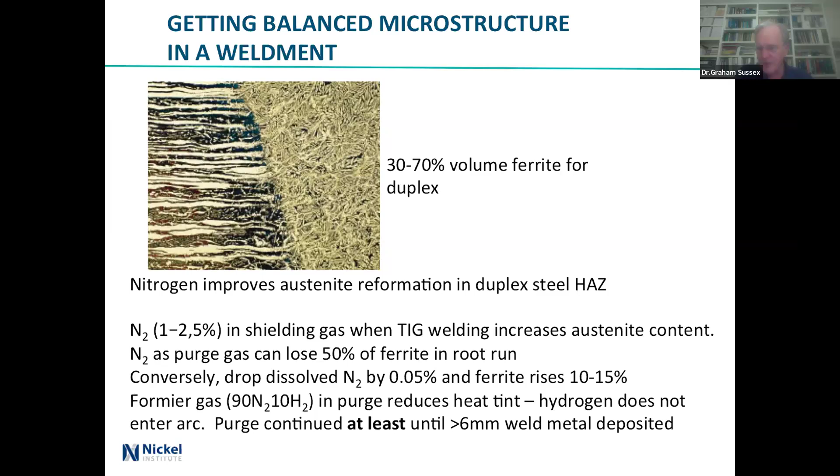I have told the story to people of some people making pipework for desalination plants, good thick stuff. They did the first 2 passes and then turned off the purge gas, and the inside of the things were absolutely black, which was lots and lots of cleaning.

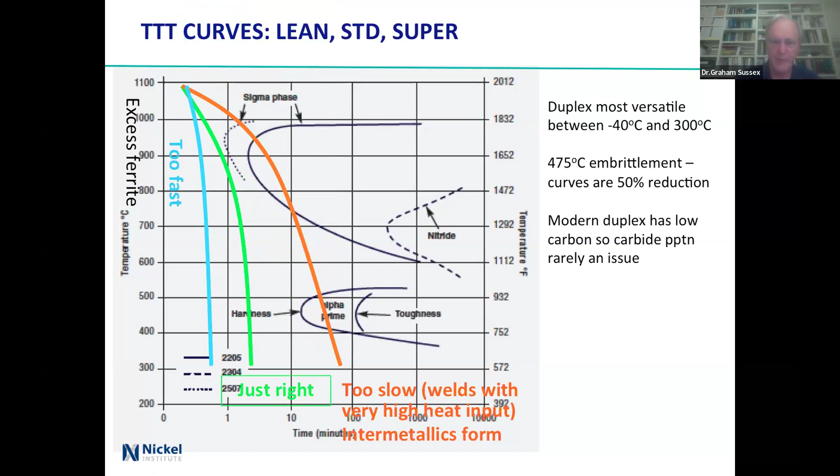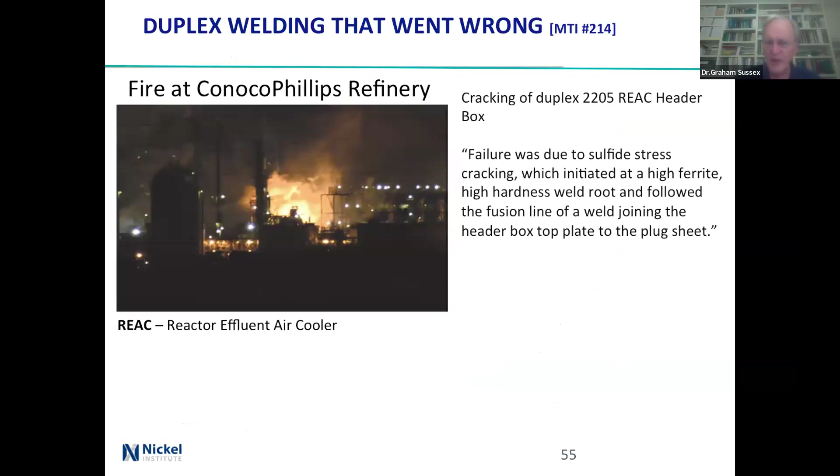Okay, this is a failure investigation at a reactor effluent air cooler. There was duplex 2205 being welded, sulfide stress cracking because high ferrite, high hardness weld root, because it was welded to something that was relatively thick and it didn't give you adequate heat. And so you wound up with a problem and a big fire.

And leaks. Wow. All right, what happens when you do arc welding?

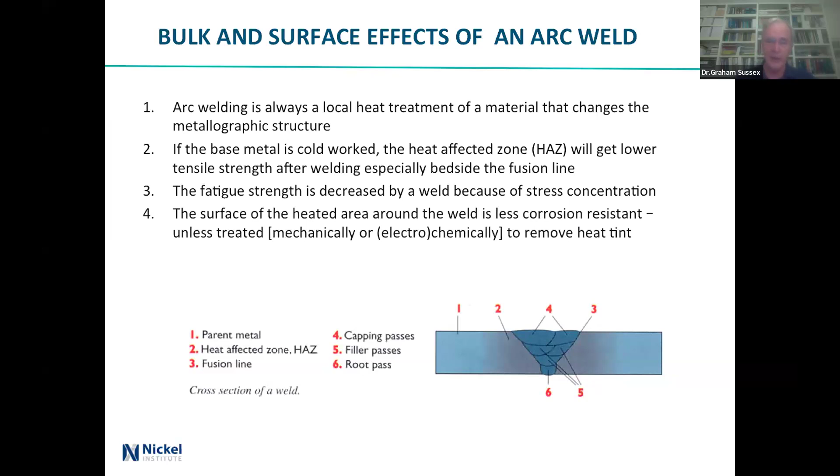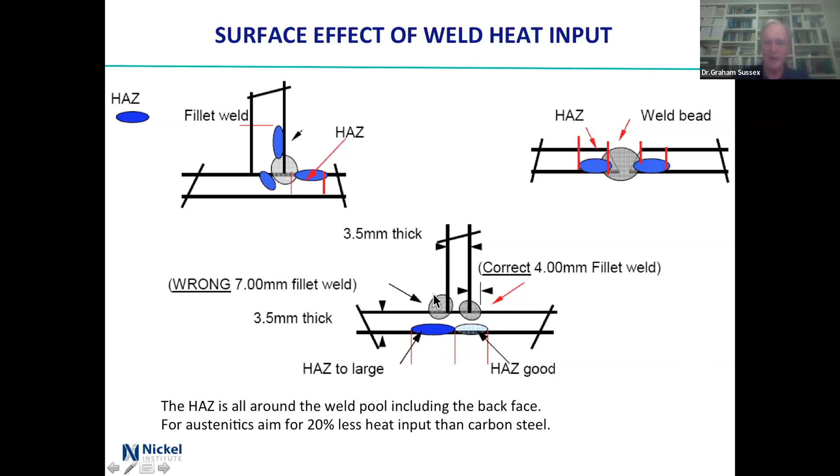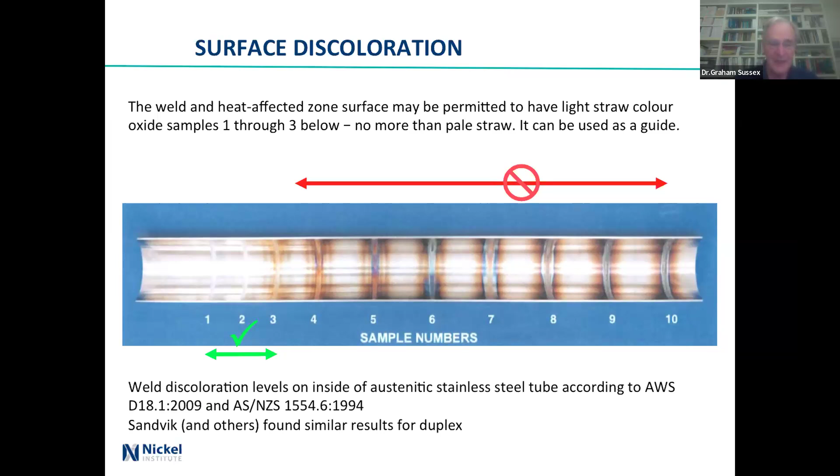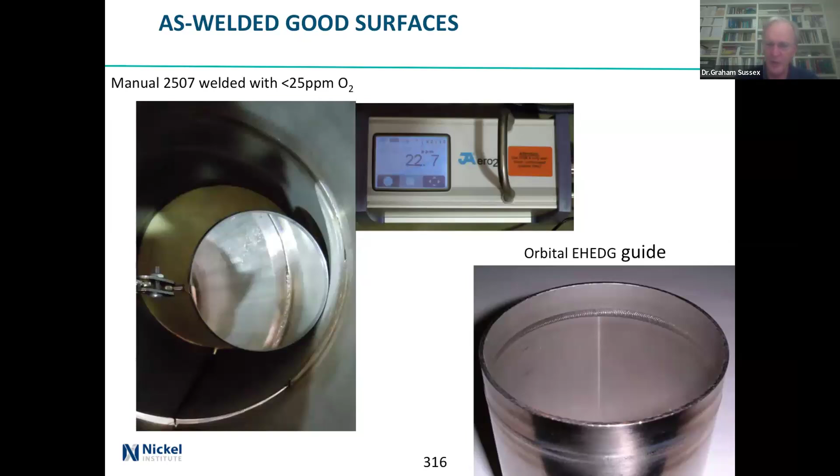This is welding, manual 2507 weld, less than 25 parts per million oxygen - actually 22.7 on the left. And this is an orbital European hygienic engineering design guide weld, which is beautiful, in 316.

So what are you going to do? Transport, storage, handling - you don't get carbon steel on it, you all know that. Sulfur - well, don't think about that, but EP oils have lots of sulfur. Grease, same stuff. Chlorides from pens or from the environment. Low melting point metals - people who ask about welding stainless steel to galvanized should shoot the buggers.

Still, areas affected by cutting usually have to be dressed up, especially if they've been heated - plasma cutting, or to a lesser extent laser cutting, because of the lower heat input and the nitrogen gas purge, which is basically used for blowing the metal away. And you need dedicated tooling and working spaces.

Heat input and interpass, talked about it. Tack welds do matter for Duplex - should be more frequent because it's stronger, more frequent and longer than austenitic, but you've got to grind them out. You can't just leave them there.

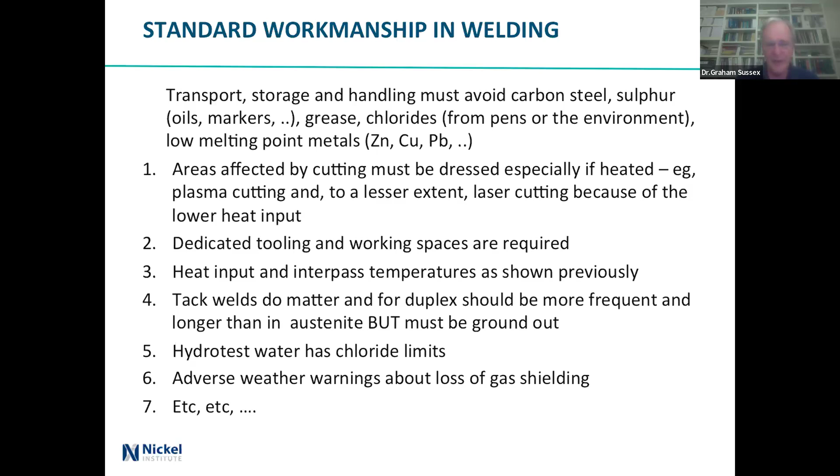Hydrotest water has chloride limits - typically people talk about 200 parts per million, but sometimes that's too much. And adverse weather warnings about loss of gas shielding.

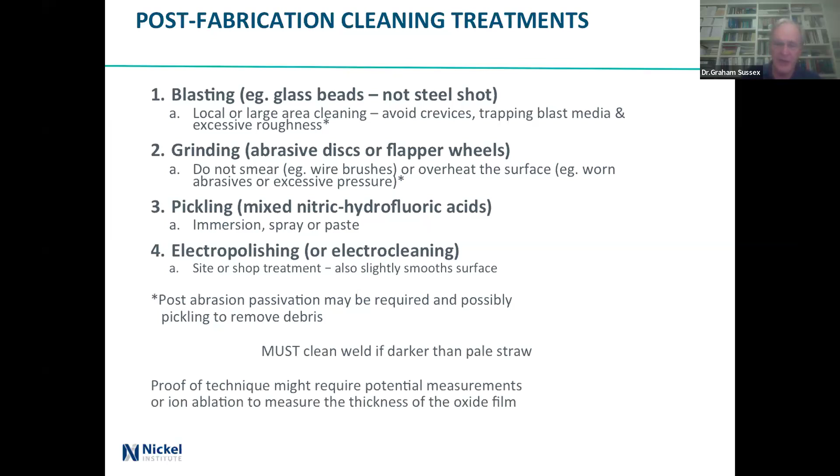And if you've got a weld and it's got darker than pale straw, then you've got to clean it. You must, otherwise you're asking for trouble. As you go down there, you get better results. The proof of technique that you're going to use may actually require potential measurements, or you put it in an Auger spectroscopy and hit it with a beam of ions and measure the thickness of the oxide film, which people can do. It's a bit expensive, but you can prove a technique that way.

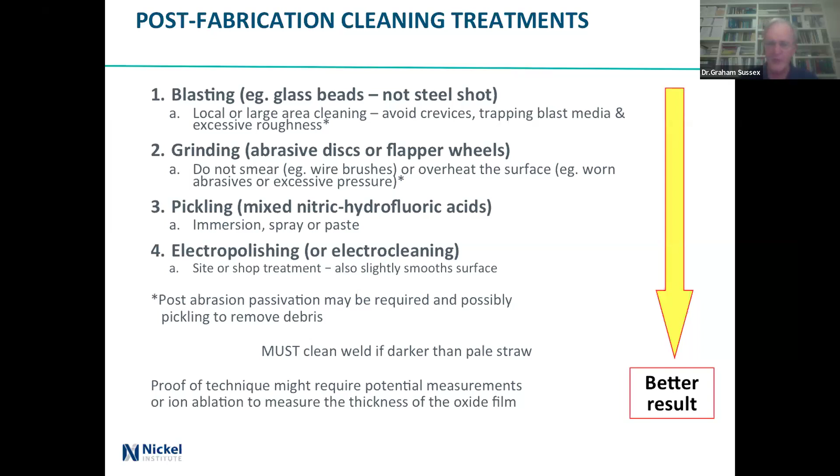And that's it. Thank you. Any questions?